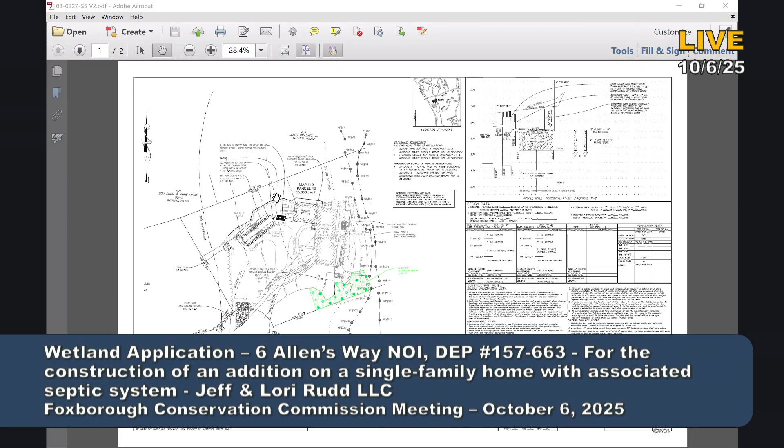So we're proposing the construction of an addition along the western side of the existing house. The addition will be approximately 722 square feet - that's the footprint - and it will consist of an additional bedroom for the parcel. Due to the construction, approximately 2,750 square feet of riverfront area will be disturbed, and 1,200 square feet of buffer zone will be disturbed.

So this addition is lying entirely within the riverfront area as well as the 100-foot buffer zone. The addition will sit no closer than 54 feet to the river and 44 feet to the wetlands. Due to the location of the existing septic system, as well as the additional bedroom added to the property, we will need to reconstruct the septic system.

You can see the septic field just underneath the addition here - it consists of 4 concrete chambers. So to address this, we're proposing the use of an innovative and alternative system due to the close proximity to the resource areas at this site.

So since we're within the riverfront area under the Wetlands Protection Act, this project qualifies as a redevelopment, as it involves the expansion of an existing structure within a previously developed riverfront area. So in order to comply with these regulations, we're proposing a mitigation area in the southeast portion of the property.

When we were over looking at the mitigation area, it was also apparent that water comes down pretty fast on the driveway, so I installed an additional erosion control, just a silt sock right at the bottom of the driveway to prevent water from rushing down and washing out anything that we plant. Other than that, those were the only changes that I made to the plan thus far. That's about it.

One thing, I know you just said to put a silt sock at the bottom of the driveway. I was thinking of something more permanent to catch the runoff and snow runoff, rain, whatever, from going down into that area. Can you put something more permanent, not necessarily a structure, but maybe some riprap or something to stop the flow from going down there? Because that's going to be delicate down there while the restoration work is being done.

What's the condition of the area that will be the mitigation area right now? Currently it's like a little cleared area. He has a little fire pit in there, as well as just debris from the yard, and I think it looked like an old fence in there. So all that will be cleaned up, and then they can go in there and do their plantings.

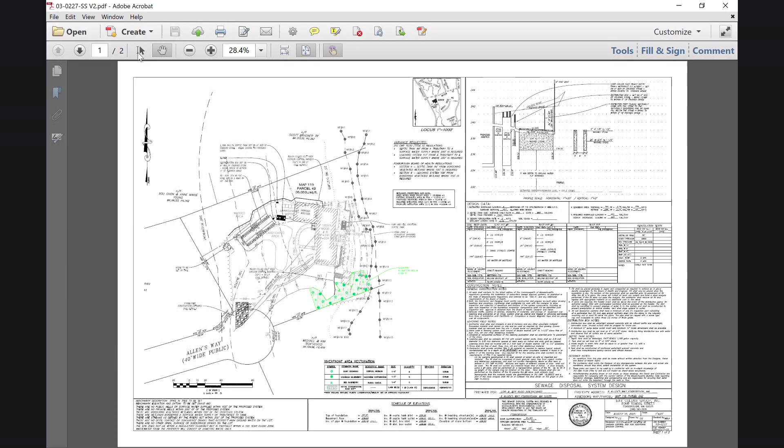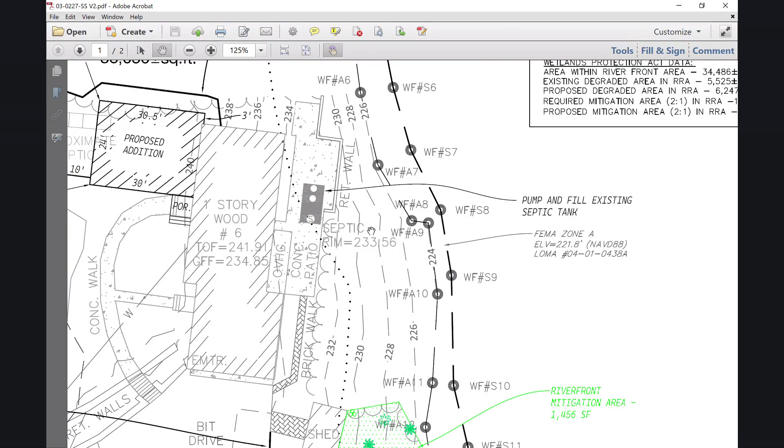What's on the slope behind the house now? You can kind of see the wood line there. There's a patio in there with a retaining wall, and then after that it drops off pretty severely down to the river, and it's really not disturbed. Their backyard's pretty limited, so it's natural tree growth in that area.

We worked with a neighbor some years ago. They had trees they wanted to take down because it was in danger—pine trees about 100 feet tall. One was right up next to the porch, and another was right next to the bedroom, so they were a little scared, posing a hazard.

Anything else? No, that looks good to me, Craig. Do you want to give your two cents, our blessings? I don't have too many, or any additional concerns other than what was expressed on the site visit about the erosion control. I agree with the permanent erosion barrier at the base of the driveway—I think that'd be great. With those addressed, I don't have anything to add.

With it being the riverfront, that mitigation area has to be a certain size compared to what they're disturbing—I'm assuming those numbers work out? Yes, based off the table here. For the mitigation, we have to do a 2-to-1 ratio. We're disturbing 722 square feet, so 2-to-1, we have to do just over 1,444 square feet, and we're proposing 1,456 square feet. Thanks.

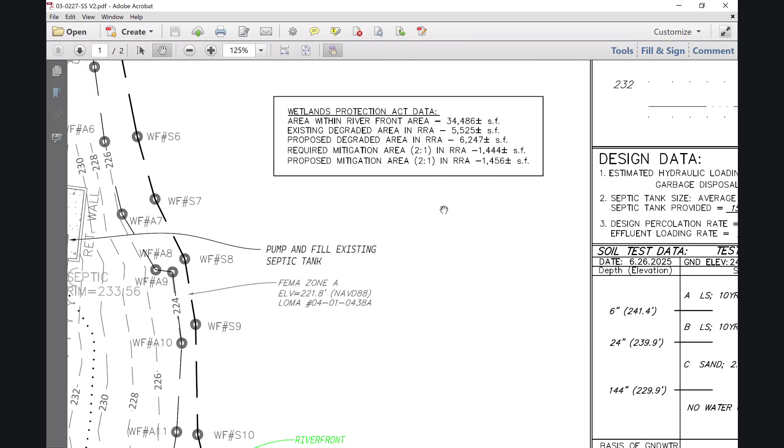Just go a step further here. Explain about the riverfront and the percentage that you can disturb versus areas that are disturbed, so we have a clear understanding. So with the riverfront area, since this is an existing parcel and it's been previously disturbed, it's disturbed beyond the limits that David's talking about.

So this lot is 36,000 square feet, so we can only disturb 10% of that, so it'd be 3,600 square feet, and we're well beyond that limit just based off of the existing impervious here, so the building as well as the driveway. So this additional work, even though it's in a yarded and grassed area, it's still not considered degraded because it has topsoil, so that's why we need to do this mitigation area, to basically restore the riverfront area in terms of the regulations.

One thing that has worked about the end of that driveway - sometimes they'll dig it, this is sandy soil here if I recall. Yes, it's all sand and gravel, but they could have a trench filled with stone, so instead of channeling it, it goes right into it and filters down. Even in the winter it can do that. So that might be an idea you might want to look into. Yeah, that's a good idea. Trench at the bottom.

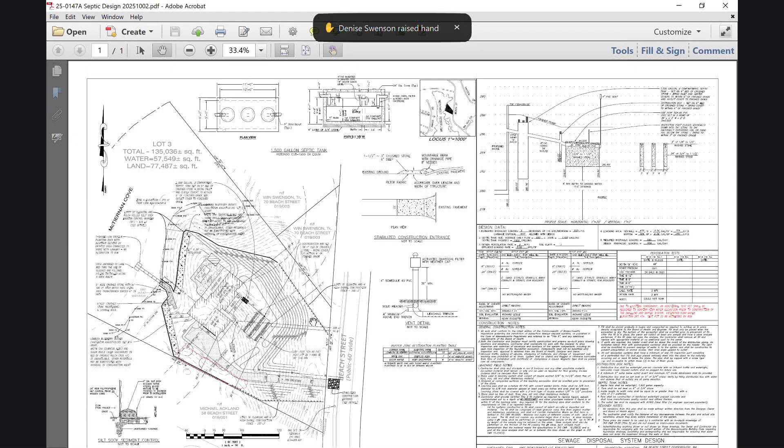Can you just explain the limit of clearing on that plan? Yep, I'll just start right over here on the right side. You can see the dash and X marks. That's just the limit of clearing marked by the orange construction fence up to the 100-foot buffer zone, which is that dashed line. After that, it will consist of silt sock.

Again, we went out on a site walk last week, and Craig raised concerns about the runoff coming off of this site, so we'll also be installing a silt fence in addition to that silt sock.

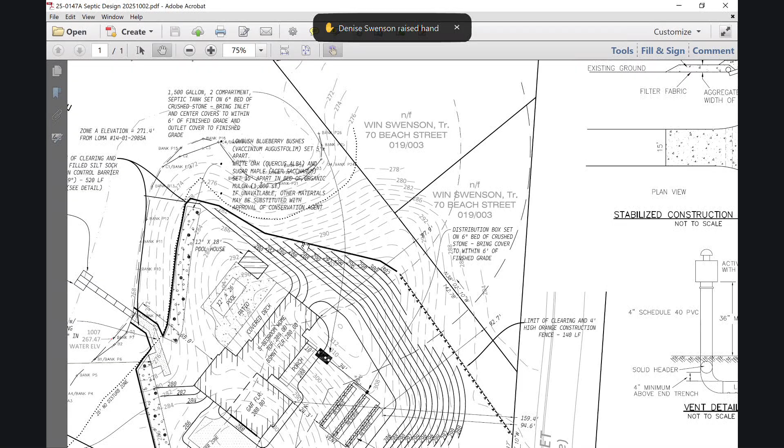The erosion control will go around, and then I show it going down towards the dock, and it'll pick up on the other side, come up, and then goes back up, and then changes over again to that dash and X line, which is just the orange construction fence.

So they're going to put the silt sock and fence in before they clear? Or put the construction fencing up, the limits of construction? So how we usually do it is we have the limit of clearing staked out there currently, and the guys will go in there and pull everything down before we install the erosion control, so that way they're not destroying it as they're doing that work. Then before they go in and grub and remove stumps, we'll go in and install the silt sock as well as the silt fence.

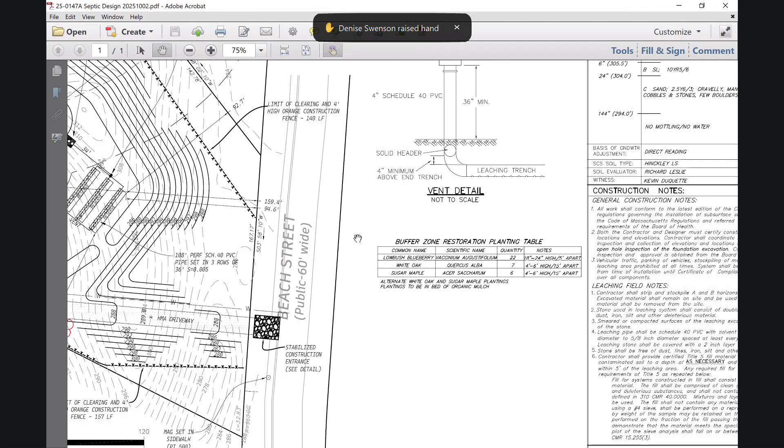The last thing I wanted to mention was that we also show plantings located at the back of the property. We weren't asked to do this, this just provides an additional buffer area we thought, and we show a mixture of shrubs and trees planted. Craig had requested that we put a planting plan or a planting table on the plan, so we have that, which just shows the quantities and the type of plantings we're proposing.

How deep are you going to make the mulch for the plantings? Because that is pure gravel. Yeah, brown gravel, water would just go zipping right through. I don't specify how thick it's going to be, but I could put that on there so we're all on the same page. So you think 6 inches or? Oh, 6 won't be enough. Not if you're planting trees and you want them to survive before the deer eat them.

Are you gonna be saving some of the topsoil? Yeah, so the topsoil, we're gonna retain on site and use as much of it as we can. But you can see the topography of this site, it goes up pretty significantly, so we're gonna be knocking down a pretty big knoll out here.

And again, the topography on this site's pretty crazy. It's not pretty, it's very crazy. I'm sure Mr. Bodie told you, but I doubted if he could go up the hill out there, considering how large it was, but he proved me wrong. Of course you did.

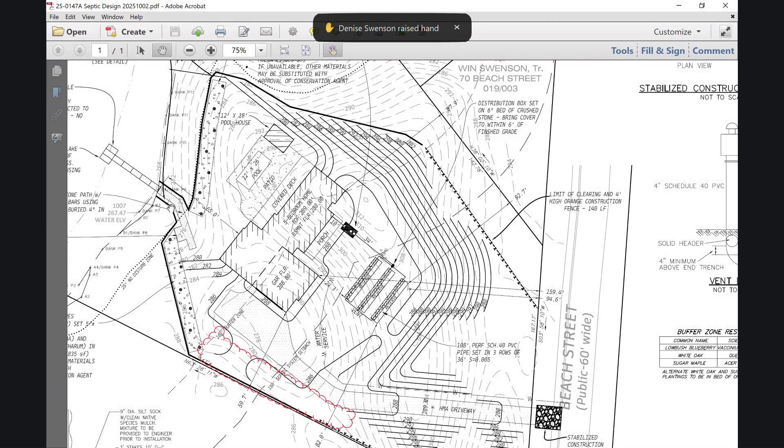They're doing that clearing with equipment as opposed to by hand? In the big area of the site it'll be equipment, but down there I wouldn't assume it's heavy equipment going in, it's much too small. No heavy equipment in there. Because usually we require nothing but hand work within the 25-foot zone.

And also, if you can avoid cutting any trees, because it's in a no-cut, no-disturb 25-foot area, try to keep it to the 5-foot width, not like Eisenhower Drive. Yeah, when we were out on the site we thought this was the best area for it. The slope mellows out here and there's a bit of a clearing, so we won't have to drop in there. It's the path of least resistance, we thought. Good, it's what we thought before. Exactly.

Good. I think one thing is definitely contacting the Conservation Agent and Conservation Commission member before it starts, walking down where they're gonna go to the water, making sure that whoever's doing the work has an understanding. We don't want mistakes again. Yeah, that's not just about trees, it's about clearing anything in the no-touch zone. Yeah, so I understand, keep it to a minimum as much as you can.

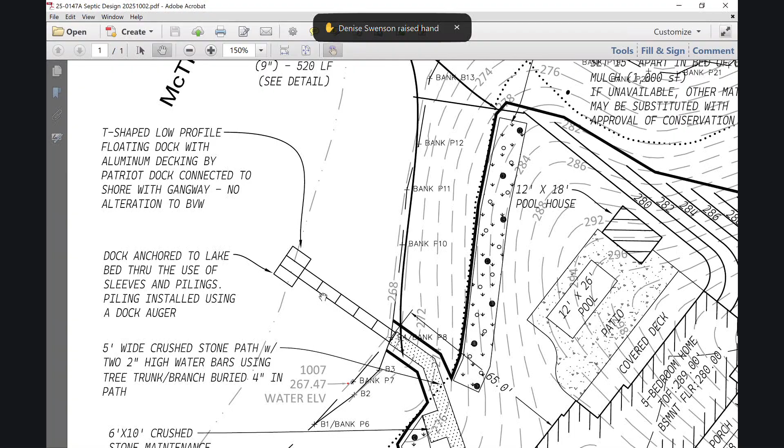I'd have to think the permanent water level out in that area is pretty shallow, if I'm not mistaken. But you are having permanent pipes? Yeah, so we'll do piling sleeves, that way it's made to come out. They'll use augers to get down to the lake bed, and then the dock can fluctuate with the rising and lowering water.

Is it a company that does that installation? Yes. I haven't said my name - Don Triani, Jake Development. I've looked into a few companies. I'm not real familiar with it, but I've done a little research, and they come out and do the whole thing.

On Eisenhower, you provided detailed information on the dock, the ramp, what's going to go in there. It's not on this plan, so can you provide that information? Yep, no problem.

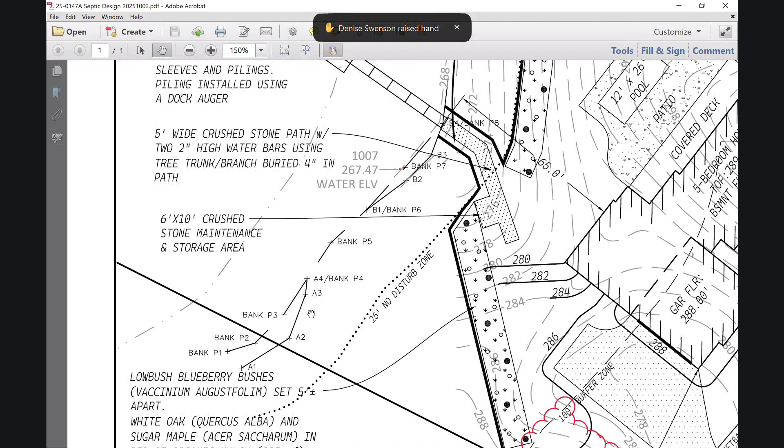There's no bordering vegetated wetlands in this area, it's just a bank. So she did flag some wetlands, but it's sporadic, off of, so you can kind of see it - A3, A2, and then there's another little one that bumps out here.

If you were there, you would understand why, David - it's very steep down to the water. I was there today. Oh, you were there today? Okay.

Anything else? Good.

You said, David? Yeah, I just need him to provide that additional information. You got the plants, the restoration mitigation plants in there, I didn't have to ask for them, it's all listed.

Is this a public hearing? Are citizens allowed? Is there any citizen speak in this? Oh, there's an abutter on Zoom. Oh, okay.

Go ahead, go ahead. Hello. My name is Denise Swenson. I didn't know if there was any citizen speak portion on your agenda. Sure, go ahead, now is a good time.

Thank you, my name is Denise Swenson. My family and I own 70 Beach Street. We're one of the abutters right next door - please speak a little louder. My family and I own 70 Beach Street, we're one of the abutters to 64 Beach Street. I wanted to thank the conservation members and their staff.

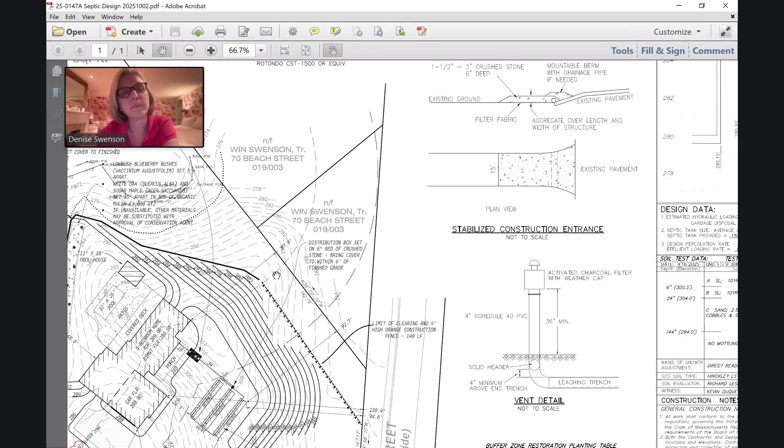Yeah, so we're about 30 feet, I would say, away from that rock wall along the property line.

So one of the first things that I did when we went out there was walk that property line. So if you're standing, let's say, where the septic tank is, and looking out to Beach Street, that hill is to your left, roughly. I walked up that hill where you were standing, and then down the other side, and I believe I put ribbons in the tree, which is probably a good 30 to 40 feet from the property line, and I know the stone wall that she's talking about.

So that slope on their side will stay there, but we're cutting the slope on our side to bring the water back towards us. So it won't, nothing on the front of this lot will go, it will have to go up 15 to 20 feet to increase any water to go to that property.

And I'm also always around, could do a site walk also. Yeah, you could tell on the plan here that the natural slope is here with the trees on it, and you're cutting actually in, and the water will go this way. So that you can see.

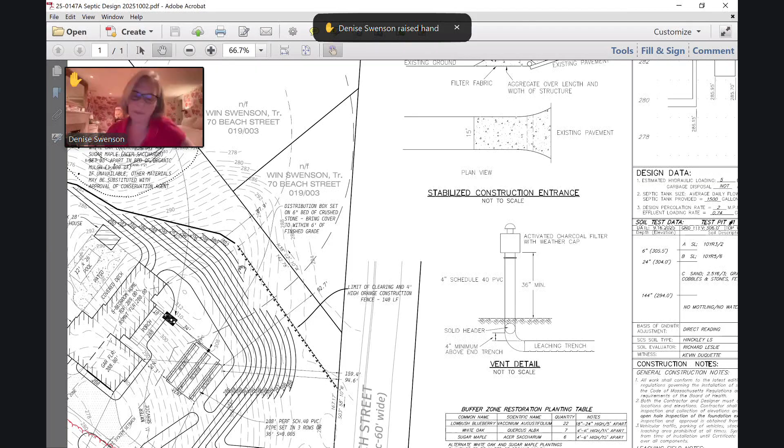So where those X's start, that's outside the 100-foot buffer zone, so that's no longer in the Conservation Commission's jurisdiction. Up to a point. But they're not doing anything beyond the X's going further, so there's no reason to, they're not touching the land.

I understand that, but they are doing work. They're cutting earth and trees and disturbing the land uphill. So the water is going to wash all that construction down slope. So I just feel like I'm not getting much protection there.

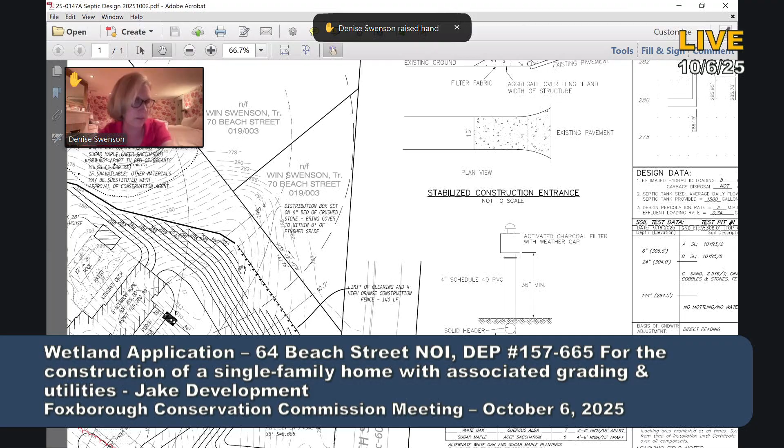But if the town advises me, I will take it to the next step, I imagine, which would be the planning board or what have you. I'll follow the town's advice on that, if this isn't the proper venue. Well, it seemed like they were willing to put in a silt fence, which I'll take, but I'd like to get whatever protection I can - I'll take a silt fence.

Just to explain, where the sock and the fence is going to go in eventually, you're going to put up limits of construction fencing on the outside where that's going to go, and then they'll come in and do the clearing, and then they'll put the silt sock and fence after that, right? Correct. And then after that, he inspects it.

He inspects the fencing too. And then you'll be doing the grubbing. Yep. But that's the only time you'll start disturbing the soil, is after the limits of construction fencing, tree removal, then you put the sock in. Those things are heavy.

And you'll put the fencing in the proper way where it's dug into the ground. And then everything will be protected, and then basically you'll know exactly where to work within. Yes. So on the fencing going down next to her property line, you're not going to be removing all the

trees down the bottom? Just the areas you're going to be filling or altering? Yeah, so we're trying to limit our work in there. It's just really trying to catch that existing grade. So I show that limit of work, but as much as we can retain in that area, we will.

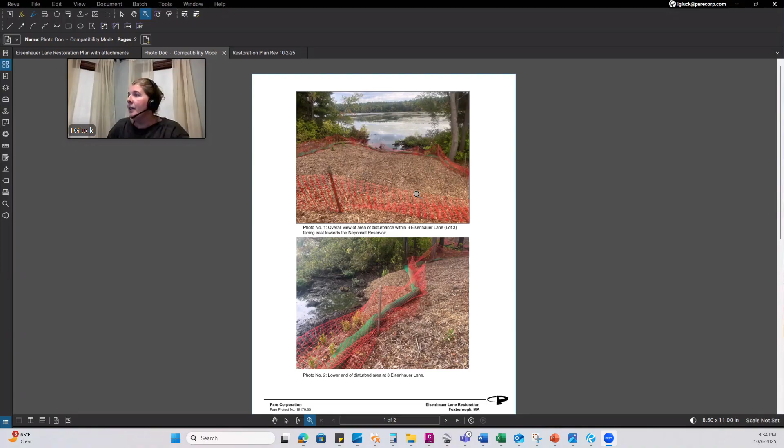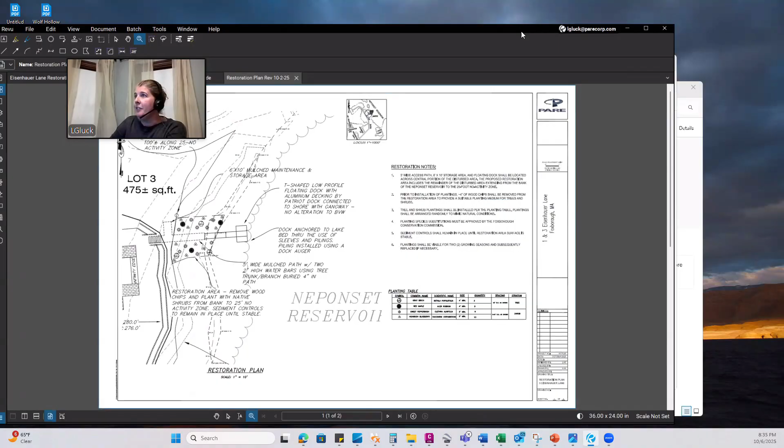The second photo is a view of that lower end. You can actually see some seedlings starting to come up through the wood chips. This house is already occupied, and they're already storing a boat down here. The location of this path does correspond to what was shown on the plans originally approved by the commission, whereas the other one was in a slightly different location, but the contractor did say he discussed the location of the Lot 3 dock with the former conservation agent, John Thomas, who was acting as interim agent at the time.

With the packet we provided, there's a letter outlining the background and rationale for what we're proposing, but I'll jump right to the restoration plan. This is that first site, Lot 3, I just talked about. Looking down, this is the house looking downslope. This area is the disturbed area within the 25-foot no-disturb zone. The intent would be to place the dock and pathway through the center of that existing disturbed area, down through the retaining wall and down the slope, with restoration on either side.

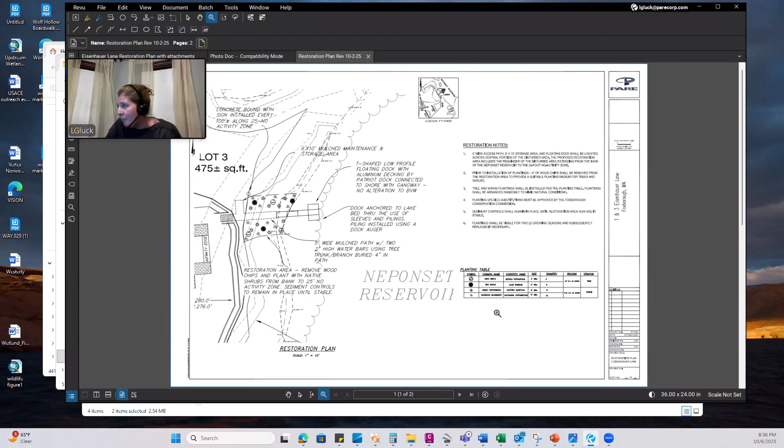Based on our discussions at the site visit, the commission would like to see the wood chips, about 4 inches thick, come out for those restoration areas, so that material would be removed just to create a plantable surface corresponding to the original grade, then planted with a variety of trees and shrubs. Because this was the wider of the two areas, the 30-foot wide one, we anticipate there probably were some saplings and trees that came out beyond what was allowed. So we're proposing to put back 6 trees, gray birch and red maple, along with some shrubs, sweet pepper bush and highbush blueberry, which were predominant throughout the site, and we think they'll do really well there.

The floating dock location is shown here, right down the middle, and the storage area here. The second sheet of the restoration plan shows just that.

Quick question - are they going to leave the wood chips as the path, or are they going to put gravel or something else for the path? Because if they leave the wood chips, and the homeowner wants to change it, he's going to have to come before us again. So I'd like to get it squared away early rather than later.

Cam might be the one to answer that question. I know that the intent was to keep it wood chips for now, and I'm not sure about what the future owner would wish to do.

On your plan, you have a 5-foot wide mulch path with water bars. We originally showed a crushed stone path, but I figured since the wood chips are already there existing, we would leave that. I think that would be the intent of the homeowner moving forward, is to retain the wood chips.

I just don't want to have any confusion if he wants to put gravel or whatever, so just make sure he's aware of that. I put that on the plan - that if there's any change of material on the path within the 25 foot, they have to contact the local conservation agent.

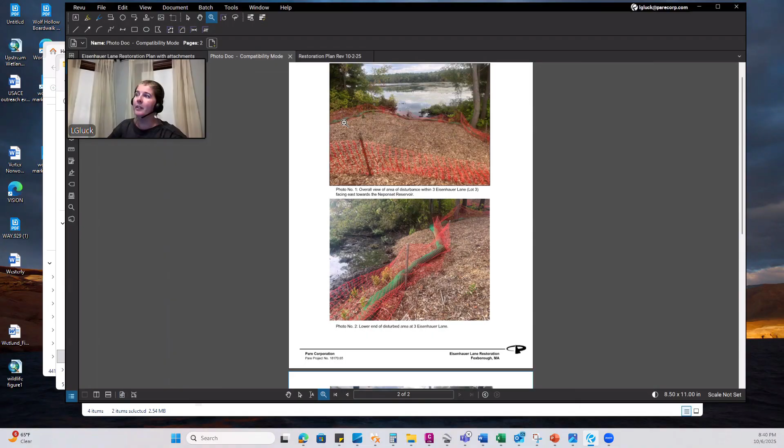So was the bank covered with the chips also, all the way down to the water? What are you going to do about that? They'll pull the chips out.

Pull it all out. And some of the plantings will be along the bank to help stabilize that. There's already stuff starting to grow, but the larger size saplings and shrubs will help to stabilize the bank.

The bank was still fairly solid. I mean, it was all cut, but you had 4 or 5 or 6 inch little stubs left.

Can we put cement markers for the 25-foot? Yep, I actually showed that on the plan originally - the 25 foot. There's one here, just to the north of our proposed dock location, at the edge of the mitigation or restoration area. You can see it on my screen, this circle right here.

Gotcha, yeah. And the trees are going to be positioned so it'll sort of deter them from naturally widening the path in the future?

Yeah, I did put - so the trees are these 6 larger icons here. I put those a little bit further back just because we don't want limbs hanging over and intersecting the path that they'd have to trim back. But we do have some shrubs almost right up to it. Again, we don't want root systems to get in the way of the path either, so we didn't go right up to 5 feet - we went just a little bit beyond to give them a little tiny bit of space to get down there.

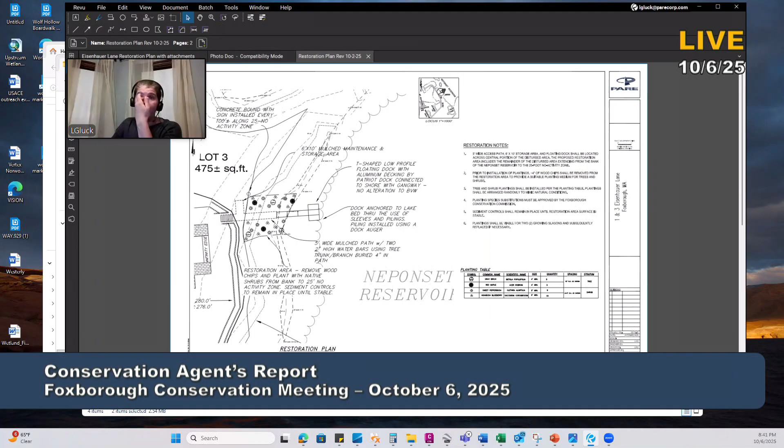All right, so I can move on to the next plan if you'd like. It's very similar to this one, except in this case, I have one more thing about the previous plan, if possible.

On the plan, it lists the trees to be 4 to 6 feet. Is it possible to get larger trees, or just to give them a couple more years' head start? We would have to look into what's available. I know this time of year, sometimes it's hard to get the species you want at the larger sizes, but if that's the commission's wish, we could go 6 feet minimum. But we haven't checked into the nursery stock to see what they have. 4 to 6 is typically what we put on restoration plans.

So I'll leave that up to the commission. I defer to your recommendations if you think that is what is most likely to survive and is attainable, but I think the larger, the better. Yeah, no, I agree.

Laura, why gray birch? It's just a species that does well in early successional environments, and it does well in full sun. And I think I did see some around the site in other areas. Usually when I'm developing these plans, I look at what's growing in the surroundings just to inform what will thrive.

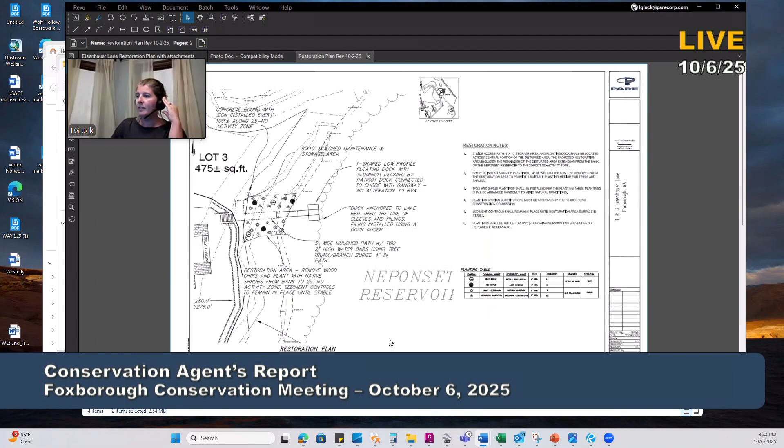Any other questions on Lot 3? Nope, nope.

Okay, so this is Lot 4, number 1 Eisenhauer. For this one, we're only proposing shrub plantings. This is the narrower of the two, about 15 to 20 feet wide of disturbance. And we did look back at the clearing, and it appeared that only the trees that were approved to be cleared were taken out, hence why we're only proposing shrubs here.

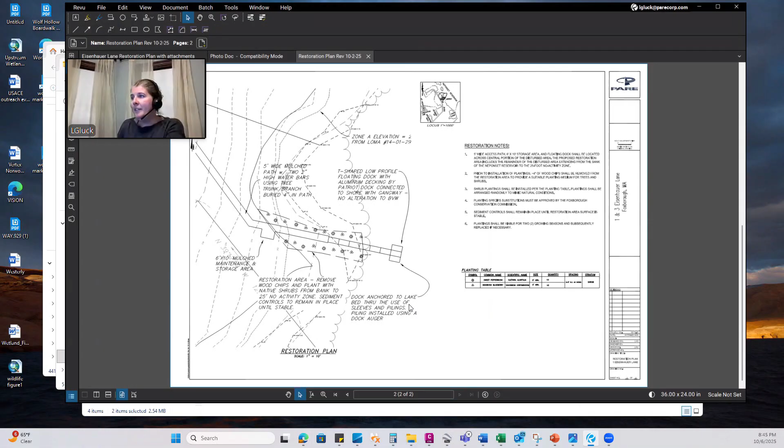But again, we're using the same mix, the sweet pepperbush and high bush blueberry, which we found dominated the surrounding wetlands and buffer zones, and then placed them at the same spacing here, right up to the bank. When I was out there, we noticed quite a lot of growth along the bank, but we did make sure to put one on each side at least to help anchor that bank a little bit better.

Same width of path, same configuration with the dock. And again, as long as they leave the wood chips for the path, if they want to make any changes, they have to come before us. So would you make those notations? Yep.

Also, I don't know if you have any of the boundaries again. I'd like to have the boundaries here as well. The 25-foot boundary? Yes, please, the cement post. Okay, so Kim, you'll add that onto your plans? Yep. Okay, great.

So that's really all I have. If anyone has any more questions on the restoration, I'd be happy to answer. No, that's good, we're good.

When do you anticipate starting on this? Well, we want to get the plantings in this fall, ideally. So as soon as authorized, I believe the applicant will be looking into sourcing these plants and getting them installed. That was my impression.

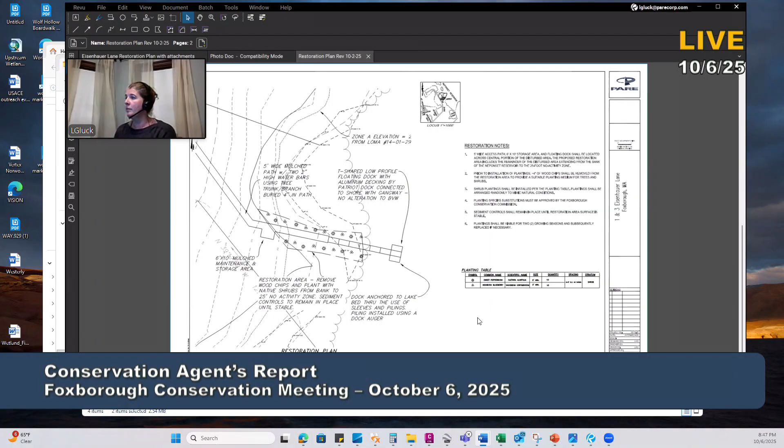Okay, and we understand that if there is something that's not available, any substitutions would be run by the commission. So as soon as he's looking into what's available, we'll be in touch if there's an issue finding any of these. And I think Craig would like to check it out as construction or restoration starts, just to keep an eye on it. Yeah, keep them in contact. Okay.

Keep in contact with the office and give Craig a heads up when it's time to do the plantings. Okay, that makes sense.

We have two orders of conditions already issued, right? Yeah, an order of conditions has been issued for each of these properties. One of them required notification of the location of these amenities and contacting the agent. That was on the first one, right? Yeah, and we did do a site walk for that one.

Are we going to modify these two conditions? Because he has complied by submitting a revised plan of what should have been done earlier, and the restoration plan, which we asked for after.

I'm not sure if we have to modify anything. Who's the technical on this? I think the way it was written, it was just that the agent had to approve it. So it could be that we don't have to do any more paperwork? No, you can note it, that's kind of why we brought it here tonight, so we can note in the minutes that everybody's in agreement on the final locations of all this stuff. So we don't have to pass any motions on any of these? No.